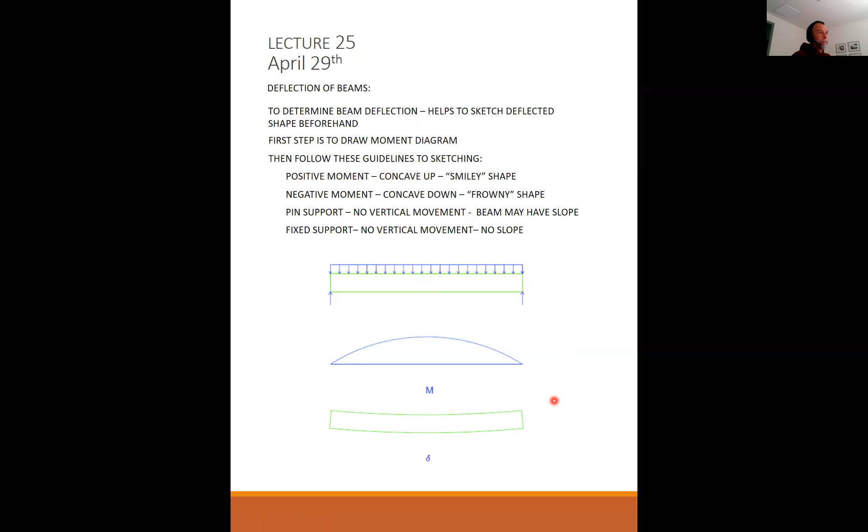Okay, so a positive moment gives a smiley shape. Now we can look at a beam that has a negative moment on it.

This is a load pulling straight up on the beam, which is the opposite of what we're used to seeing. But this is pulling straight up, and so the reactions are pulling down. The point load causes a uniform shear, which causes a linear moment, so the moment diagram is like so. This is a negative moment on the whole span, so the deflected shape is going to be a frowny shape.

Again, some of these are just intuitive—you can picture in your mind, you pull straight up on a stick, it's going to bend up like that.

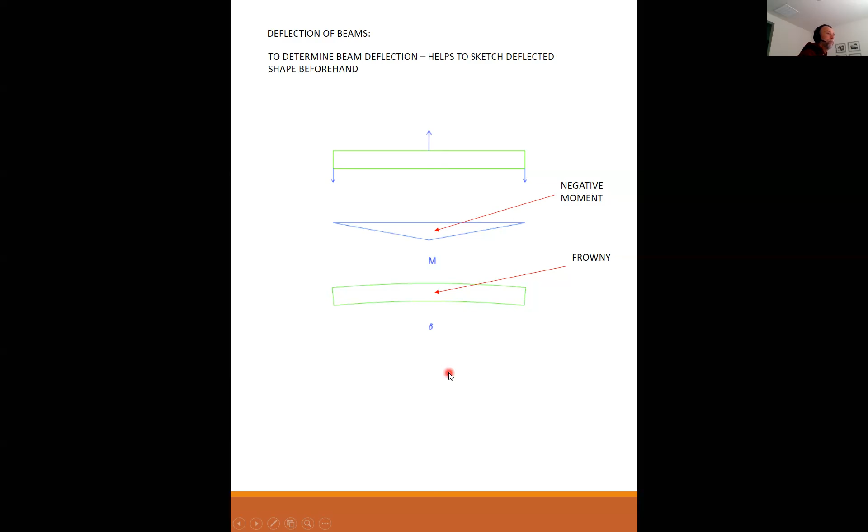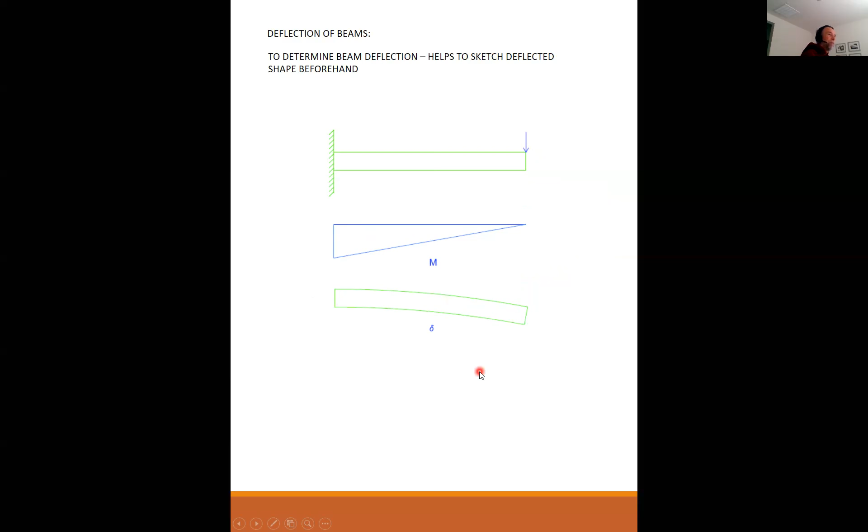There's your half frowny. However, notice that at the fixed point, you have zero deflection. You have maximum deflection out here where the load is, but zero deflection at the fixed point. You also have zero slope at the fixed point. It's a little hard to see in this diagram, but this perpendicular line is absolutely up and down, so the axis of the beam is horizontal right there at the support.

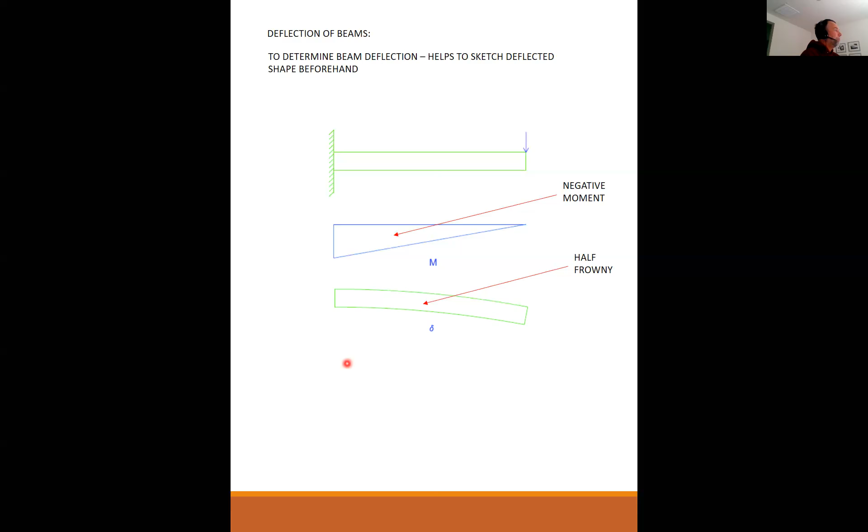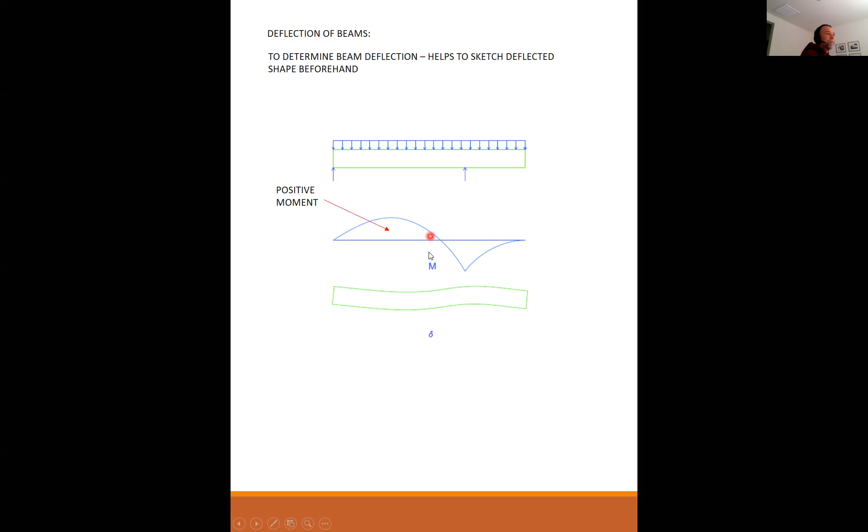So in the positive moment region, the beam is going to be deflected in a smiley shape. In the negative moment region, the beam is going to take on a frowny shape. The inflection area is right in here someplace, so that's your transition from smiley to frowny.

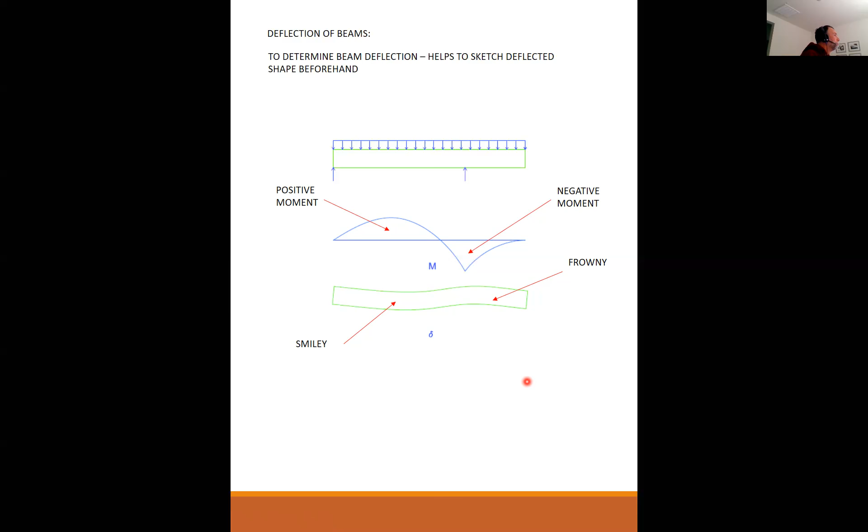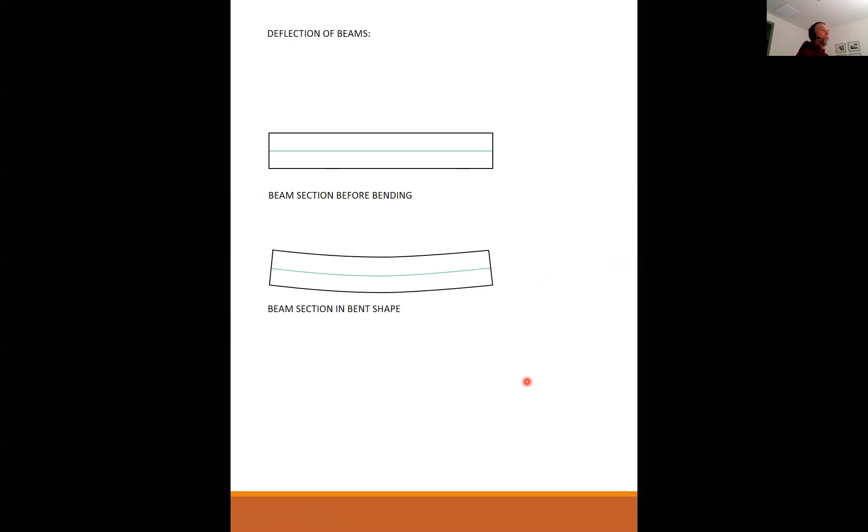Okay, so here we're going to redo a little bit of what we talked about before when we derived the flexural formula. We're going to start with the beam before bending, where the neutral axis is, of course, horizontal in the same plane as the beam itself. Once the beam is bending, then the neutral axis has to bend with the beam.

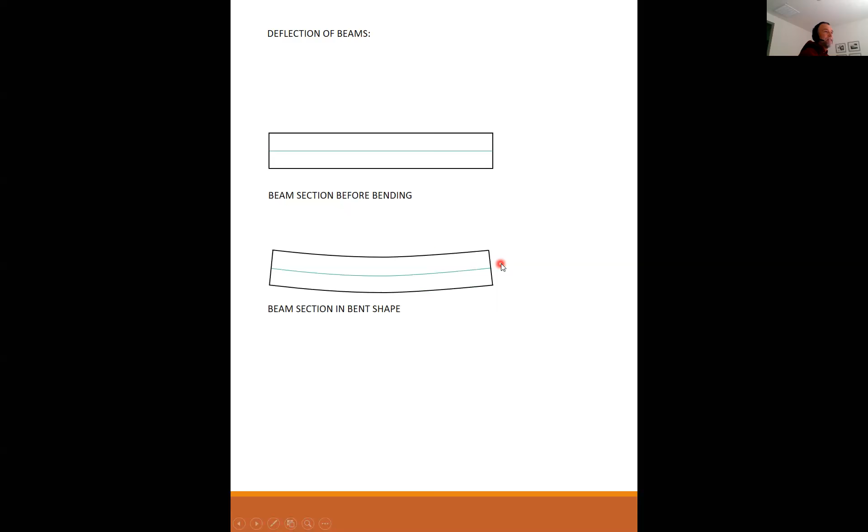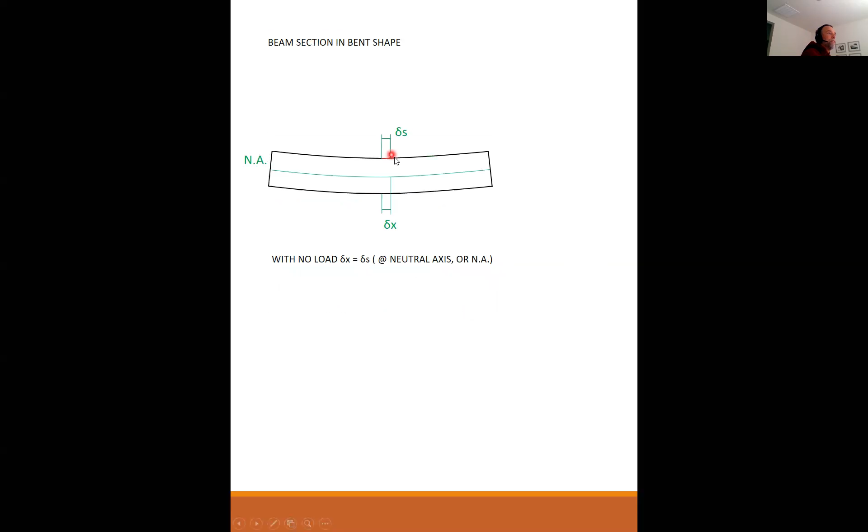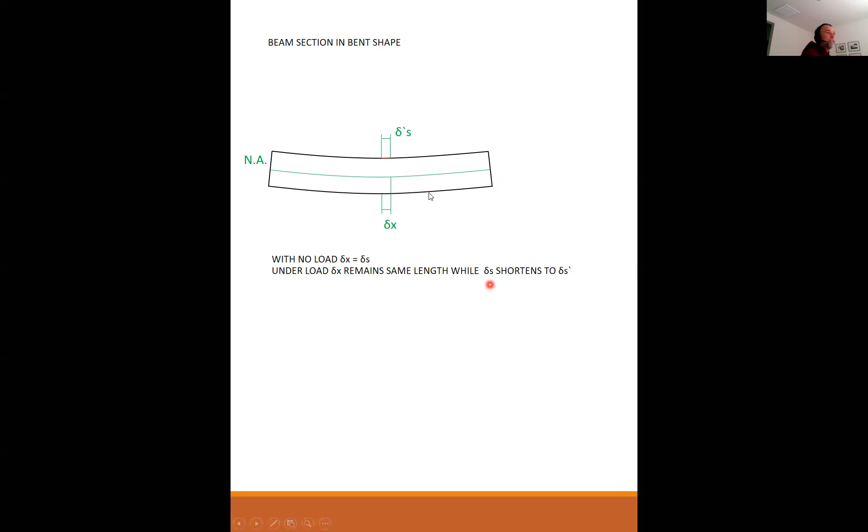We did this before, but what we're looking at is with no load, the fibers at the top of the beam will have the same length as the fibers at the neutral axis. So delta X is going to equal delta S at the neutral axis. But once you put some load on it, the top fibers are going to shorten, and the bottom fibers are going to elongate due to tension. So delta S is going to shorten to delta S prime at the top here.

Remember our equation for strain, epsilon, is equal to the new length minus the original length, over the original length. So delta S prime minus delta S, divided by delta S. But the original length is the same as the neutral axis length, since the neutral axis length doesn't change because it's at the neutral axis. So we can say delta S prime minus delta X over delta X is the strain.

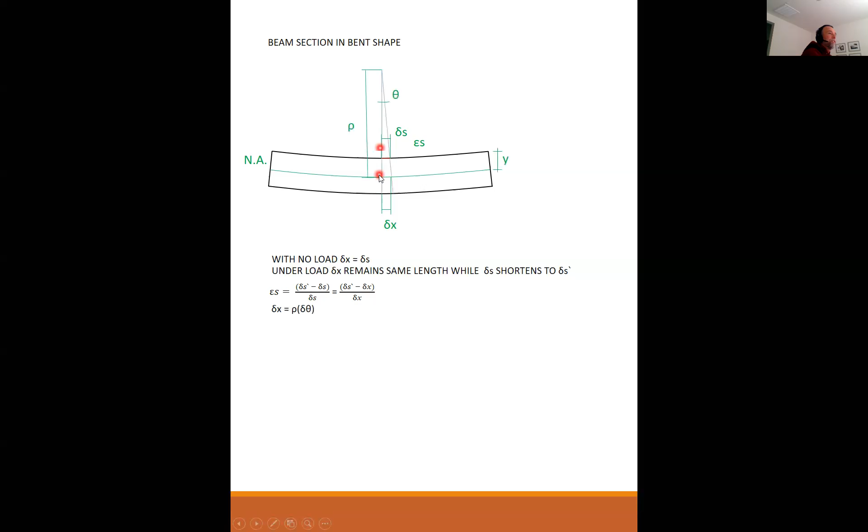By small angle theory, we can say the radius times the change in angle here. As the beam bends, this produces an angle. I labeled that theta, but down here I labeled it delta theta, so it's really the change in angle due to the loading. By small angle theory, delta x is equal to sine of delta theta times rho, which is delta theta times rho.

By the same token, if I reduce the radius from rho to rho minus y, then delta s prime is equal to rho minus y, this radius, times delta theta. So you see how we're getting the relationship here. We're relating delta x to rho, and delta s prime to rho minus y.

So y is the distance from the neutral axis to the point of interest. My strain, epsilon s, is equal to - now all I did is take delta s and plug that in here, and delta x and plug that in there - so I get this equation. The rho's drop out, the delta thetas drop out. I'm sorry, not all the rho's drop out, and what I end up with is minus y over rho.

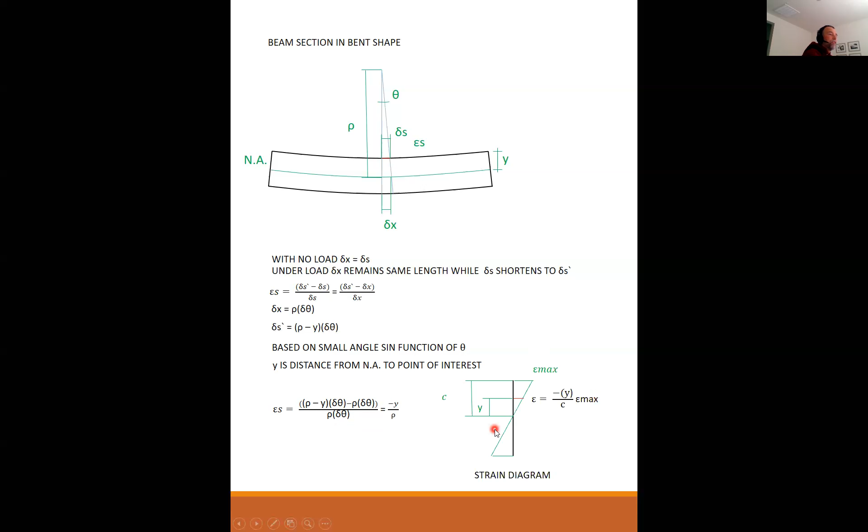This was a proportionality, this is when we're deriving the flexural formula. So I have epsilon is a proportion of epsilon max. Then I substituted epsilon for sigma over E, equal to minus y sigma max over CE. Again, kind of rehashing this, but what we're getting towards is sigma is equal to minus E y over rho.

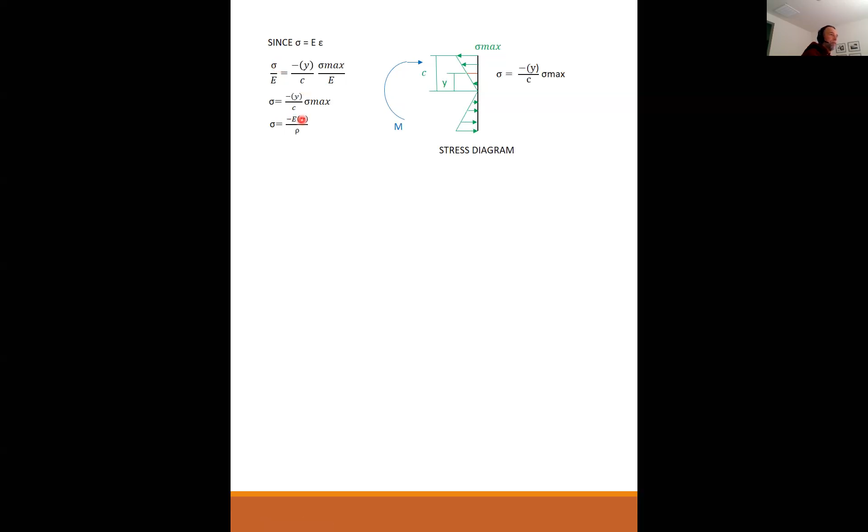Then we found the location of the neutral axis. We sum the integrals of these little pieces of the forces to equal each other, and we plugged and chugged until we got to something that made some sense.

And the neutral axis is located at the centroid for the cross section. Summing all stress about the neutral axis, the moment is equal to the sum of the moments, integral y dF.

This is the second time I presented this exact same material, so I went through it much faster this time. Do I have any questions before I move on to the new material? Okay.

So the new material: we know that sigma is equal to minus my over I, and epsilon is equal to sigma over E, that's Hooke's law, so epsilon is equal to minus my over EI.

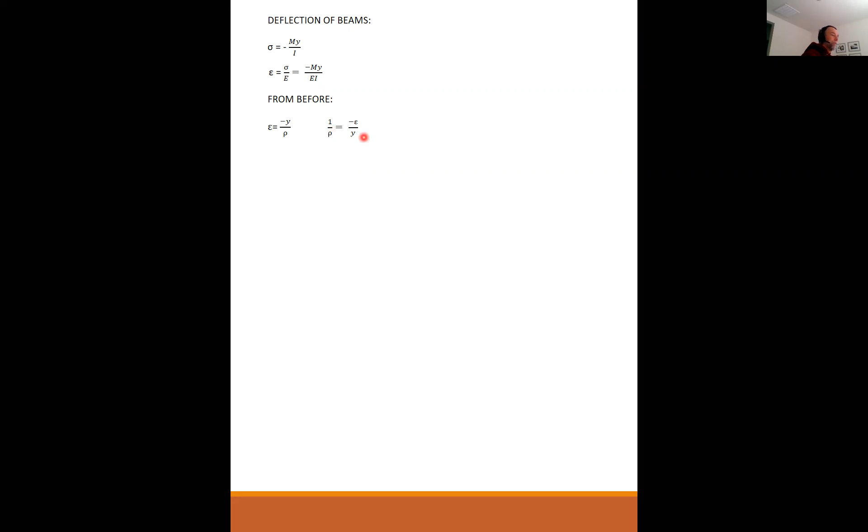And from before, we found that epsilon is minus y over rho. So I can rearrange this to say that 1 over rho is minus epsilon over y. Substituting back in, minus epsilon over y is equal to my over EI divided by y, which is m over EI.

So this is an important finding right here. This finding is that 1 over rho, which is the radius of curvature, 1 over rho is equal to m over EI. The moment divided by basically the stiffness of the beam is what EI represents.

Remember, E is Young's modulus, so that's the stiffness of the material. I is the second moment of the section, so I represents the stiffness of the section properties, E represents the stiffness of the material properties. Combine the two together, M over EI is known as the curvature of the beam.

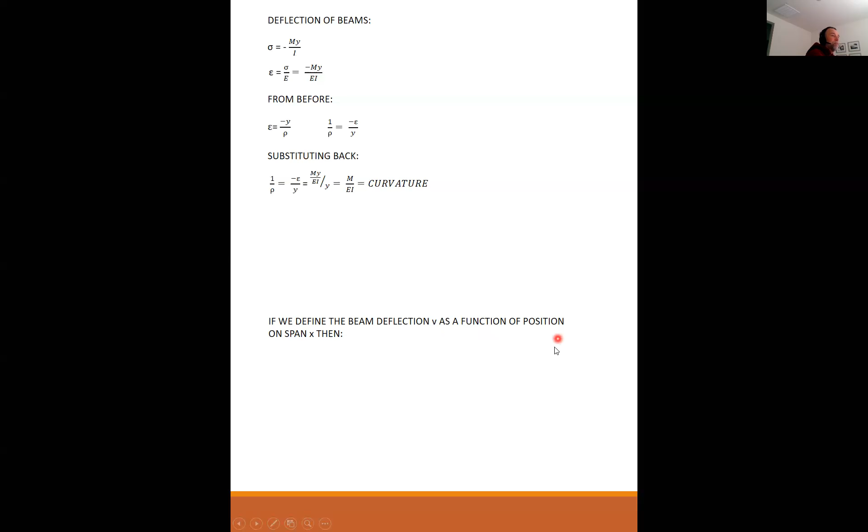So if we define the beam deflection as little v, this is not shear, this is little v, and little v as a function of position on the span x, then at some arbitrary point x, we can solve for the deflection v. V is equal to a function of x.

From calculus, we get the solution to... okay, so what I've done here, the solution to v is equal to f of x, 1 over rho is equal to m over EI.

Yeah, this is a quantum leap right here. They don't really tell you how you get this, but it's part of a partial differential equation. And when you solve it, you get this, quite frankly, kind of monstrosity. So it was basically a leap of faith from here. You had to differentiate this with respect to x to get the v.

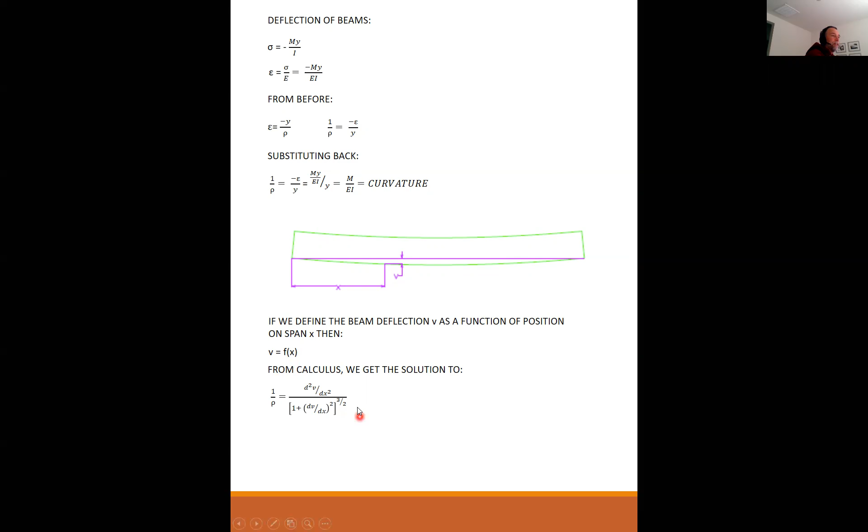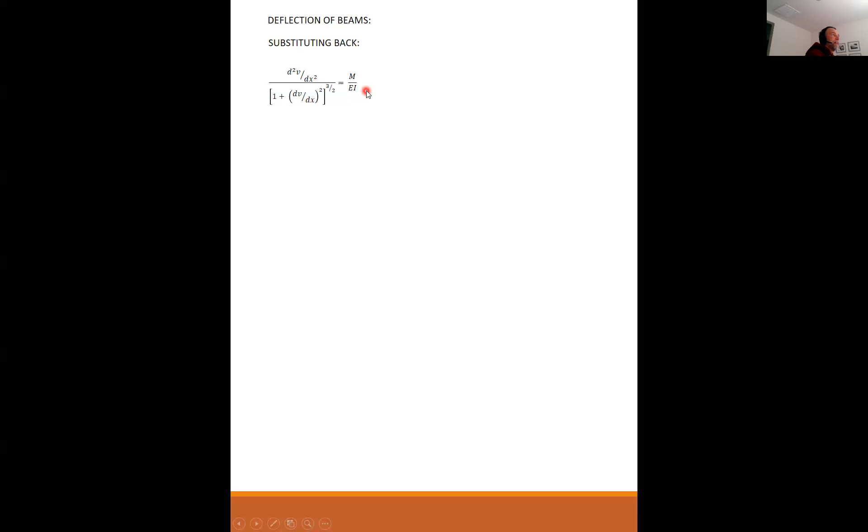Anyway, this is your final, so the curvature is equal to this expression. So this whole expression is equal to m over EI, which is pretty nasty looking, right?

Fortunately, dv dx is the slope, and the slope is very small. So what you might see sometime later in your career is that frame programs like ETABS or SAP 2000 will differentiate between small deflection and large deflection.

And most of the time when you solve for deflections using this software, what you're solving for is small deflection. Small deflection is like a few inches on a beam that's 20, 30 feet long. So a deflection of a few inches on a beam that's several feet long, this slope right here is a very small number, almost equal to 0.

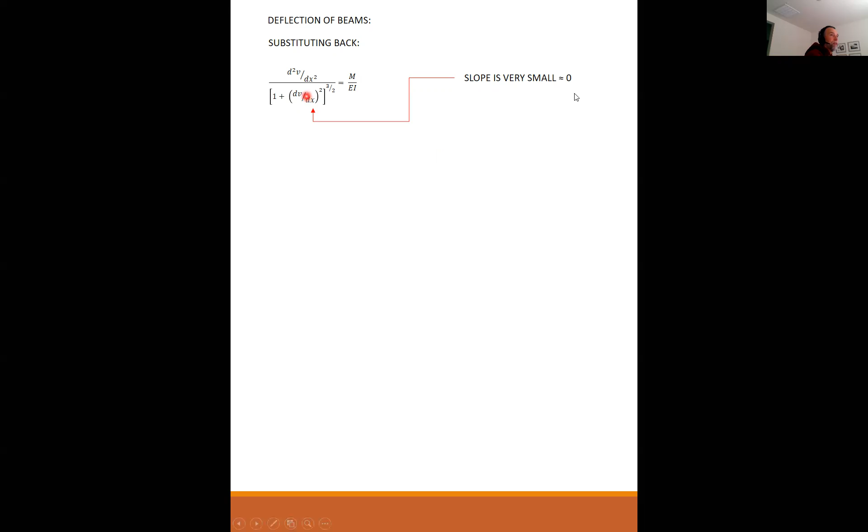And so what we can do with that small deflection assumption is take this out of the equation. If this is 0, 0 squared is 0, 1 plus 0 is 1, 1 to the 3 halves is still 1. So this reduces to a much more palatable d squared v over dx squared.

If the software says that it's doing large deflection, which is a pretty sophisticated piece of software, then they're saying they're not ignoring this point right here, which greatly complicates the expressions. We are going to ignore it. We're going to consider small deflection behavior and move forward with this formulation right here.

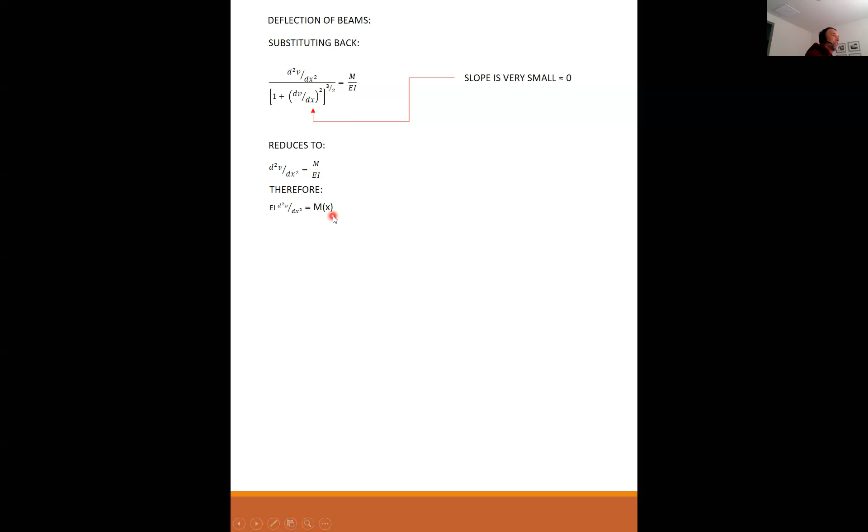So therefore, if I take the EI over to the other side, then EI d squared v dx squared is equal to moment as a function of x. This is known as the double integral method for beam deflection. And where do I get the moment as a function of x? Anybody seen that before?

Anybody remember before we did the graphic method of finding shear and moment diagrams? Before that, we had to solve for the moments as equations. I had asked you for the equation for the moment from 0 to 6 feet, and from 6 feet to 18 feet. That's what this is, the equation for the moment as a function of x.

If I differentiate this expression, then EI times the third derivative of V with respect to x is equal to the shear as a function of x. And EI times the fourth derivative of V with respect to x is equal to the load as a function of x. All of these expressions are linked together as the differential of one, the integral of another.

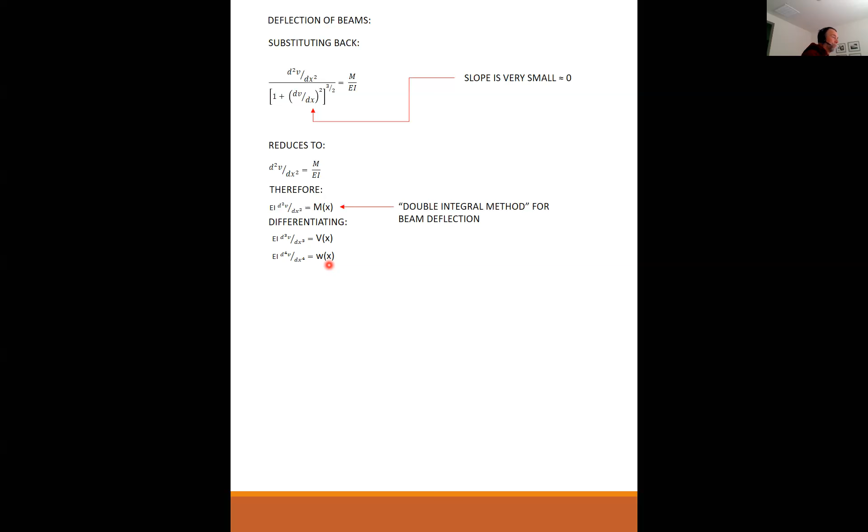Okay, are we ready for an example, to see how this all plays out? Let's start with a pretty simple one. It's a simply supported beam with a load P on it. The beam is L long and the load is applied at midspan.

You'll see that these examples I'm about to give you, I have 3 or 4 of them, and I don't use any numbers. I'm not using actual spans or actual loads. What I'm going to show you is how the tables are created. If you look in your book, or any other structural analysis book, you'll see lists of tables for common loading conditions like this.

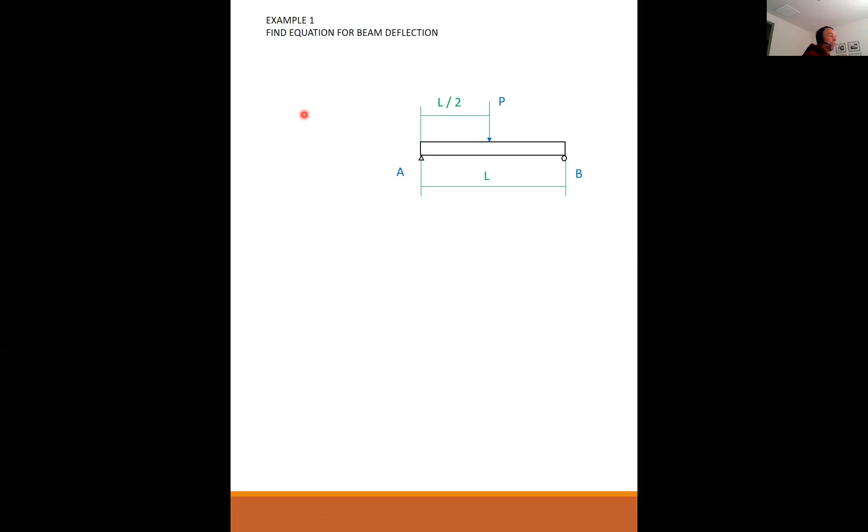They label that table in terms of P, L, L over 2, and give you maximum deflection based on these variables. So that's what we're going to do, derive how those tables came up with those expressions. Once you have the expression, you can always go back to the table and plug in actual values. If this is 10 kips and this is 30 feet, you can go back to the tables and plug those in.

So we're going to follow some basic steps here, which you might recognize. We must first create a free body diagram, and find our reactions. Summing moments about A, P times L over 2 minus RBY times L equals 0, so RBY equals P over 2, as you'd expect. Summing forces in Y, RA equals P over 2.

Now, if I decide on my cut points, remember all this? How many cut points do I need to completely describe this beam? Just 1? No, I actually need 2, but for what I'm going to do here, 1 is going to suffice. You'll see how that works.

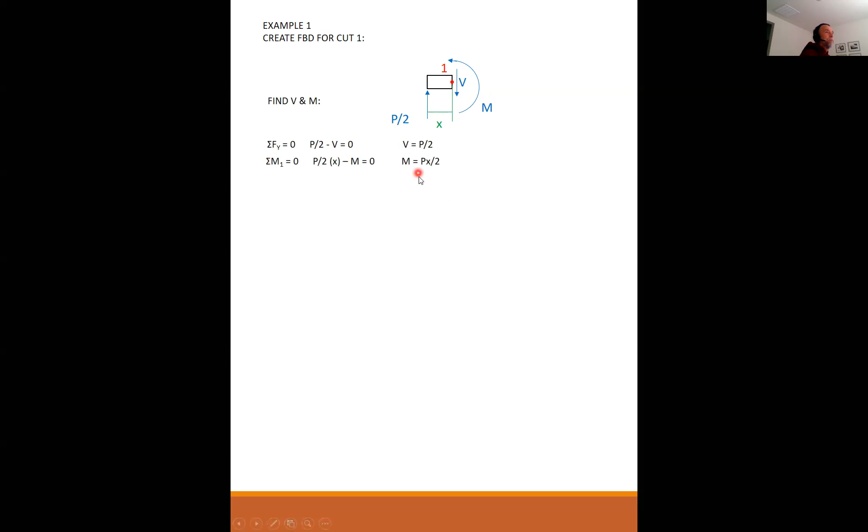Okay, so I have a free body diagram for cut number 1. Remember all this: this is my end reaction, and I have some arbitrary cut at x from the end, with positive moment and positive shear. Find shear and moment: my shear is equal to P over 2. Summing the moments about my cut point, the moment is equal to Px over 2. Here is my equation for the moment from 0 to L over 2.

So back to my equation, dV dx times EI is equal to the integral of mx, which is equal to the integral of Px over 2. If I take Px over 2 and integrate it, I get Px squared over 4 plus my constant of integration.

So this was dV dx. To get to V times EI, I have to integrate all over once again—that's why it's called a double integral, I have to integrate it twice. So now I integrate the findings from the first integration into the second integration. Px squared over 4 becomes Px cubed over 12, C1 becomes C1x, and I have to add C2, so I have 2 constants of integration.

I need to solve those constants of integration using boundary conditions. So what do I know about this beam? The load was at midspan, so I know that dV dx, which is the slope of the beam, has to equal 0 at the midspan. So at x equals L over 2, dV dx has to equal 0—zero slope at the midspan due to symmetry. This doesn't always work, but it works when the load is right at the midspan.

Expound on that, please. No problemo. Let me go back up a slide. Okay, let me go back up 20 slides. Whoa, there we go. This is a special problem.

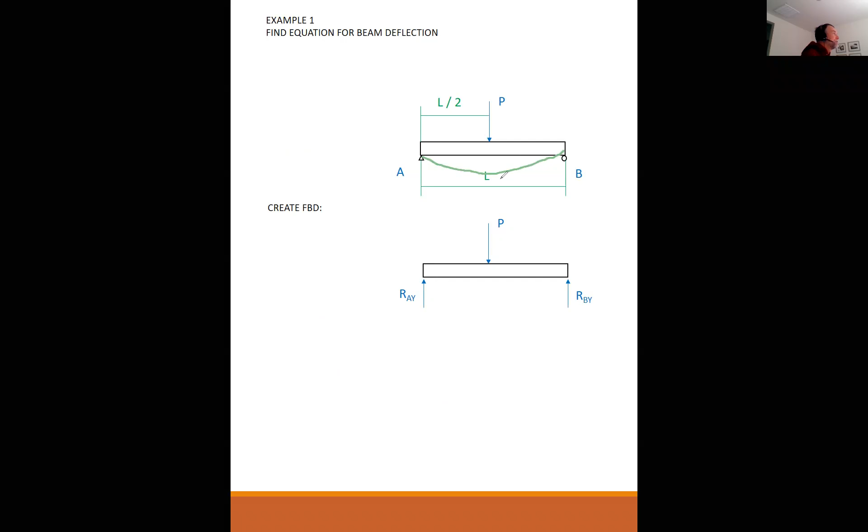But because it is in fact symmetrical, that means I came down here and I did one cut point. If I had done two cut points, I wouldn't have gotten any more information, because everything I solve for and find out between 0 and L over 2, everything on the other side is a mirror image. So I don't need to solve for the other side - I already know it as a mirror image. So that's why I only did one cut.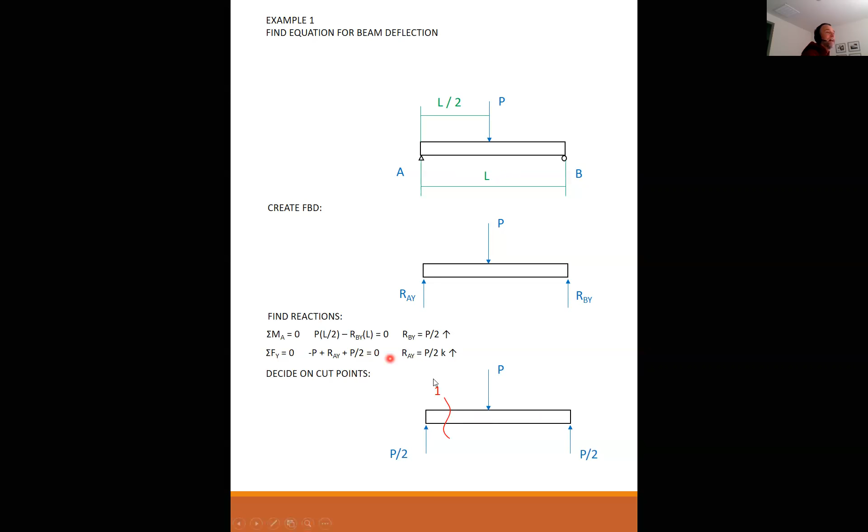So then I got all the way down here, and I got this general equation that is valid anywhere on the span, only because of that symmetry. Does that help? Yeah, thank you. Okay, anybody else? Any other questions before we keep moving?

So does that general equation hold even if the beam and its P's aren't symmetrical? No, and that's a great question, thank you for asking that. No, it does not hold if P is not symmetrical. And the reason that it doesn't hold is right here.

When you solve for your moment, this Px over 2 only holds if that load is absolutely symmetrical. Even though there's no L over 2 in here, if that P was off to one side or the other, this reaction would not be P over 2 anymore. So if this is not P over 2, this is not Px over 2, and it blows the whole thing. So everything we did from here to here is invalidated if that load is not right at the midspan. Does that answer your question, Nick?

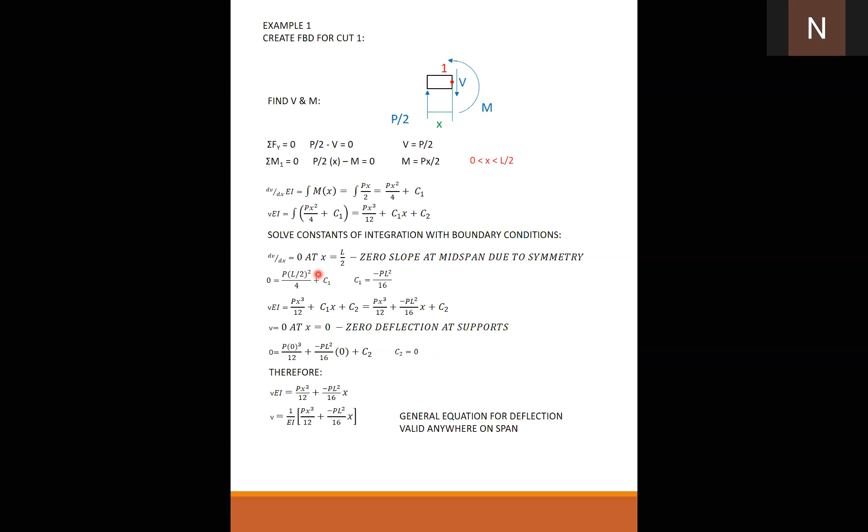No, you just said it perfectly. Yes, I got it. I wasn't sure how you made the jump from dv dx to vi to vei, but now I got it. Now you got it. For anybody else, what Nick said was absolutely spot on.

The deflection is equal to the integral of the equation for the moment. That's why it's called the double integral, but we broke it into two pieces. So we said that dv dx is equal to, because remember the original equation was d squared v dx squared. So now we're saying dv dx, the slope, is equal to the first integral, and the deflection is equal to the second integral.

Anybody else have any questions about that?

Okay, so this is the general form, and because of the symmetry, it's actually valid anywhere on the beam. So that doesn't actually give me the maximum deflection, does it? Unless I plug them in there. So what I can do is find the maximum deflection, and that's usually what most people go to the table for. So the general equation...

Due to symmetry, we can tell by observation that the maximum deflection will occur at the midspan, x equal to L over 2. If you don't believe that, then what you can do is take the first derivative of this equation and set it equal to 0.

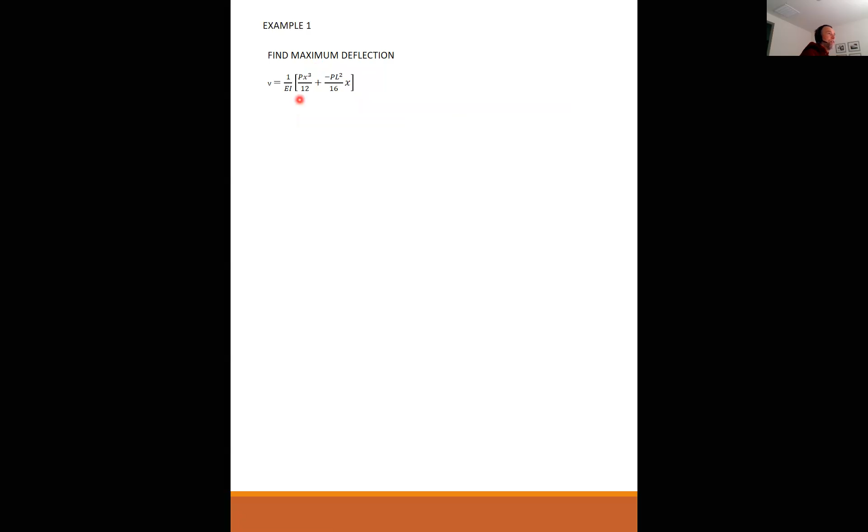Go back here just a phase. This is our final answer, the deformation is equal to this. Well, the first derivative of this is dv dx, which is the slope. So if you weren't sure where the maximum deflection is, you can take the first derivative of your expression for deflection, set that equal to 0, and where the slope is equal to 0 is going to be your maximum deflection. And I can draw that again.

If the beam is deflected like so, doesn't have to be symmetrical, just if the beam's deflected at all like that, then wherever you have—oh, I botched that, let's try that again. There, that's a little better. Wherever you have the slope equal to exactly 0, which is the first derivative of this equal to 0, you have found your point of maximum deformation.

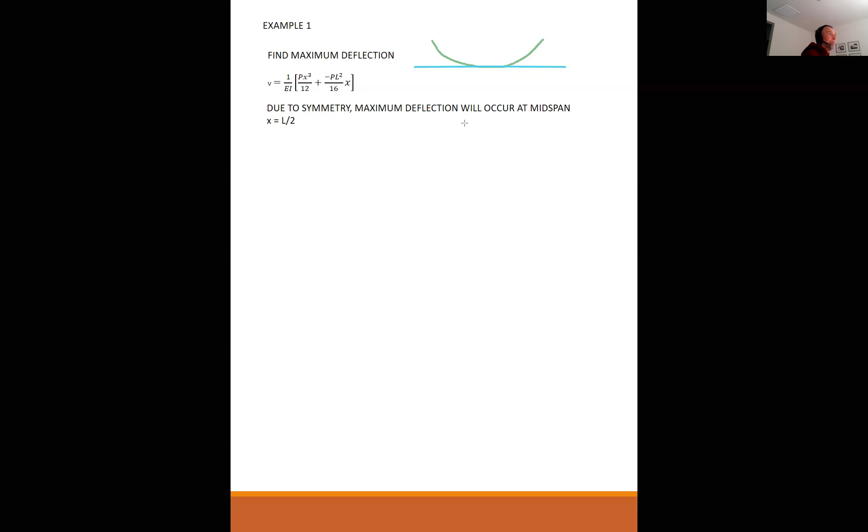Okay, so in this case, I know the maximum deflection is going to be at L over 2. So I can simply plug L over 2 back into X here and here to get this, and then clean it up, and I get my maximum deflection V is equal to minus PL cubed over 48 EI.

So this is V general, this is V max. And this right here is the value that you'll see when you look it up in a table, whether it's in this textbook or a structural theory textbook.

Okay, I think that was the end. Yeah, that's the end of that one. So any questions at all on example 1?

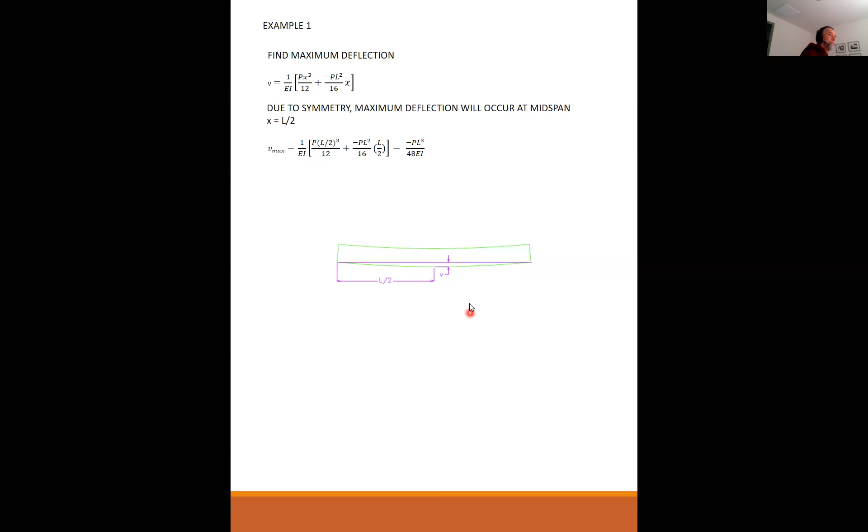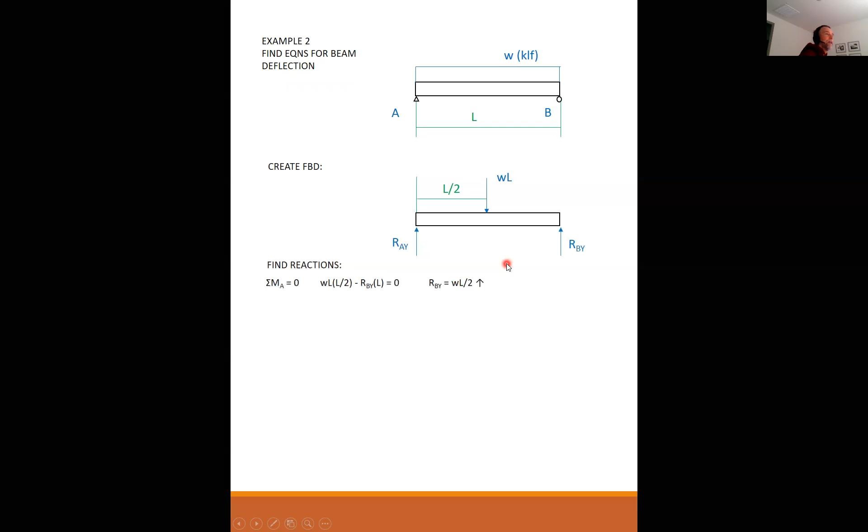Example number 2, find equations for beam deflection. Now we're going to take it up a notch. Instead of a point load, we have a uniform linear load. So I'll go through the same steps. I'm going to create a free body diagram. I've replaced my uniform load with a resultant point load of WL for the purposes only of finding my reactions. Finding my reactions, I have B is WL over 2, and A has to be WL over 2 as well.

Decide on your cut points. Well, this one's clearly going to have one cut point because there's no discontinuities in the load at all. So one cut point completely describes this whole beam.

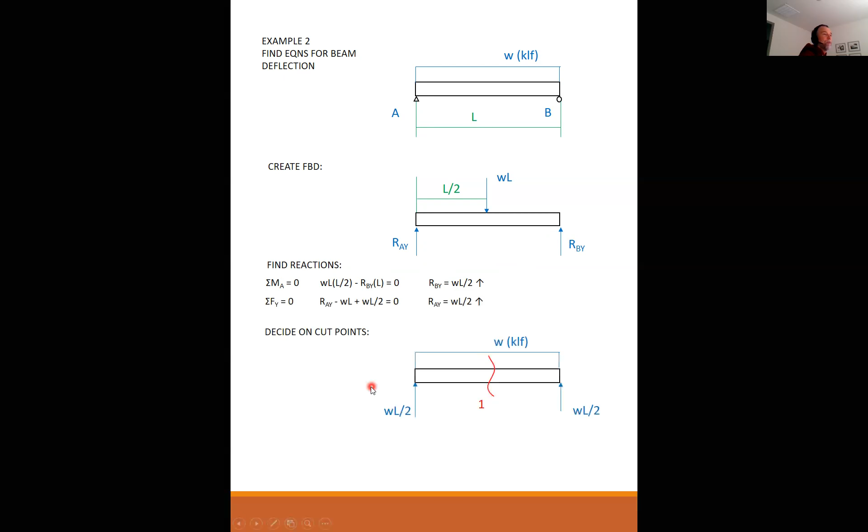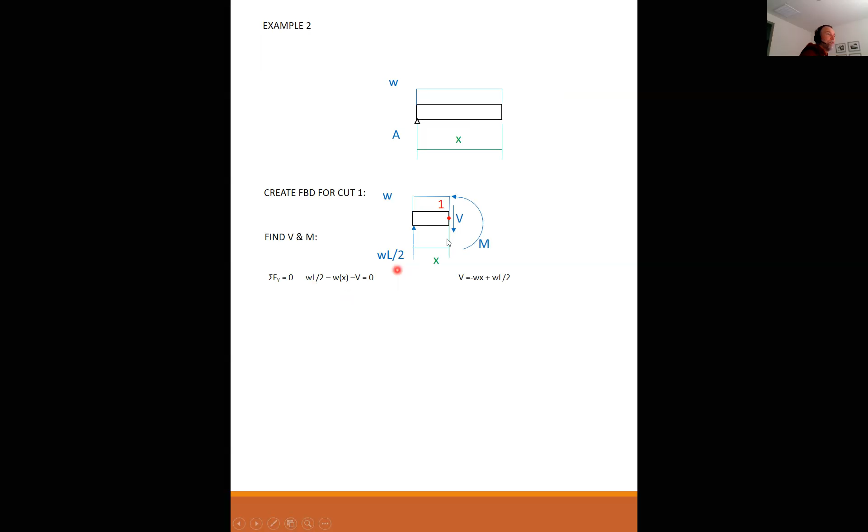So here's my free body diagram for cut 1. Here's my end reaction, positive moment, positive shear. And so I sum my moments about point 1. I have my end reaction times X. I have W pushing down times X—I'm sorry, times X over 2. I'm summing the forces, WL over 2 minus W times X minus V.

That's my expression for shear. And here, more importantly, is my expression for moment: WL over 2 times X minus WX times X over 2 minus M. My moment is minus WX squared over 2 plus WLX over 2, my expression for the moment, basically for the whole span from 0 to L.

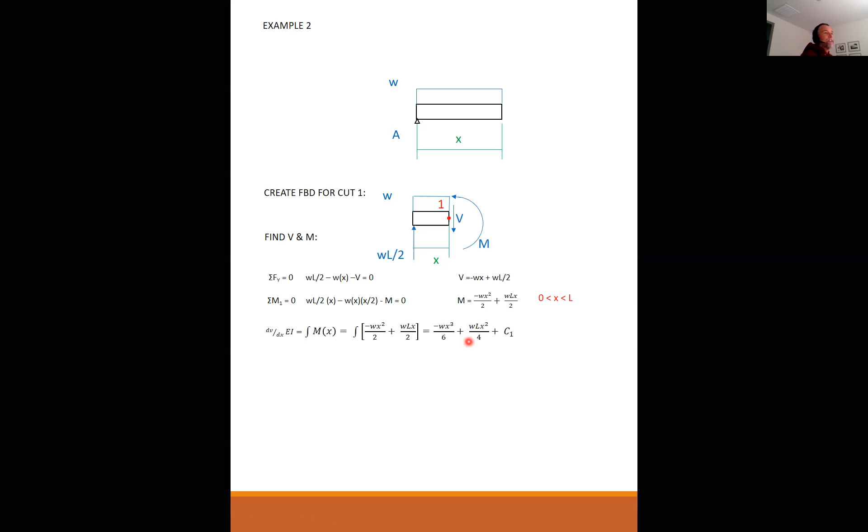Solve the integral. Minus x squared over 2 becomes minus x cubed over 6. WLX over 2 becomes WLX squared over 4, plus your constant of integration.

Now, dV dx, the integral of which is VEI, so I need to take the integral of this result. I just take this and plug it straight into here to find my second integral. So minus WX cubed over 6 becomes minus x to the 4th over 24. WLX squared over 4 becomes WLX cubed over 12. C1 is C1x plus C2.

Now, how do I solve for C1 and C2? I know you're all shy, but somebody shout it out. What am I looking for? Okay, thank you, Nick. I was beginning to wonder if my mic cut out.

Boundary conditions. I solve for C1 and C2 using boundary conditions. So like the problem before, there's two things that I know: I know where the slope is equal to 0, and I know where the deflection is equal to 0. So I'm going to use those two pieces of information. Where the slope is equal to 0 will give me C1, where the deflection is equal to 0 will get me C2.

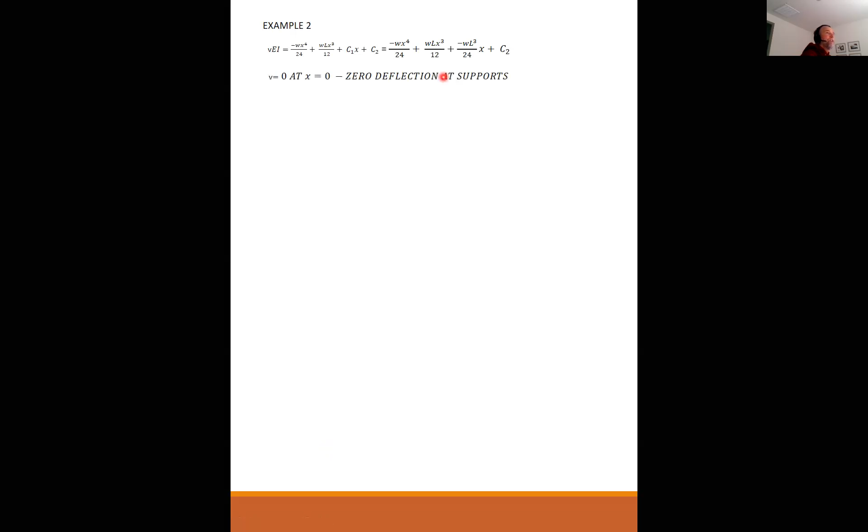To solve for C2, I know that the deflection is always equal to 0 where my supports are. My support is at 0. So I can plug in 0 for all my x's and plug in 0 for my deflection right here, and solve for C2. C2 is equal to 0.

Therefore, my final expression is going to be Wx to the 4th over 24, WLx cubed over 12, minus WL cubed x over 24.

And cleaning it up just marginally, this is my general equation for the deflection, valid anywhere on the span. So you can look this up in the table. It's a little messy, but this lets you plug in any value for x and it'll give you the value for your deflection.

Now, due to symmetry again, we know the maximum deflection is going to occur at the midspan, x equals L over 2. So I can just take my expression for deflection and plug in L over 2 for all my x's. And what I get is 1 over EI times WL to the 4th over 384, plus WL to the 4th over 96, minus WL to the 4th over 48.

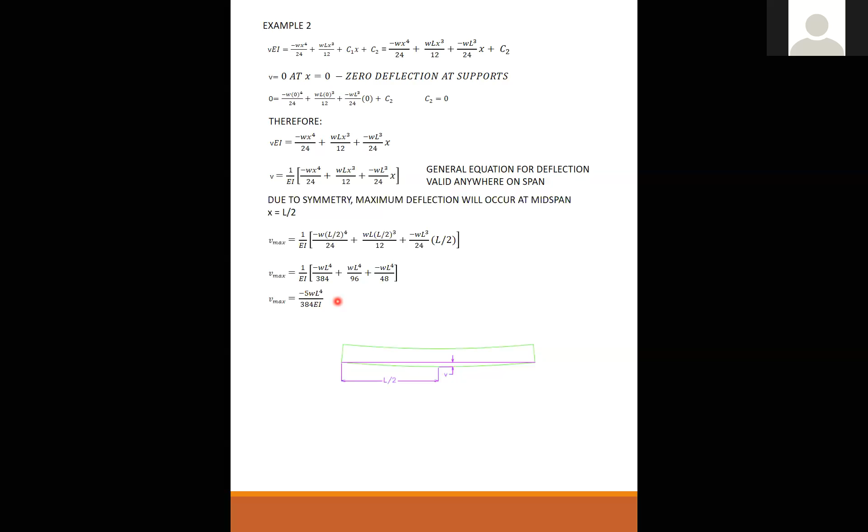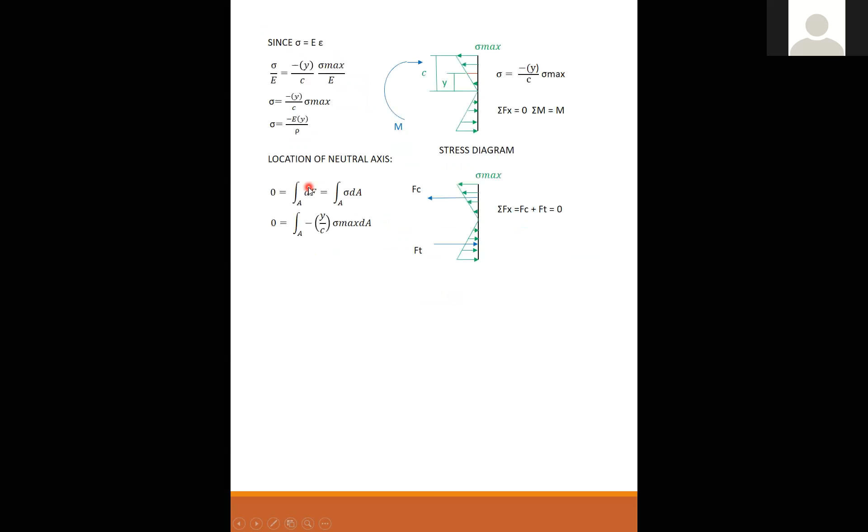Professor Pratt, yes, so what if you can go back a few slides, like maybe two slides? I wanted to see something. There, maybe like the last slide. Uh-oh. Somehow... okay, sorry. No worries. Good recap, yeah, right.

Okay, slow down a little bit here.

Okay, in here somewhere? Yeah, that looks fine. I was just making sure I saw that part. Okay, yeah, that's fine. I got it.

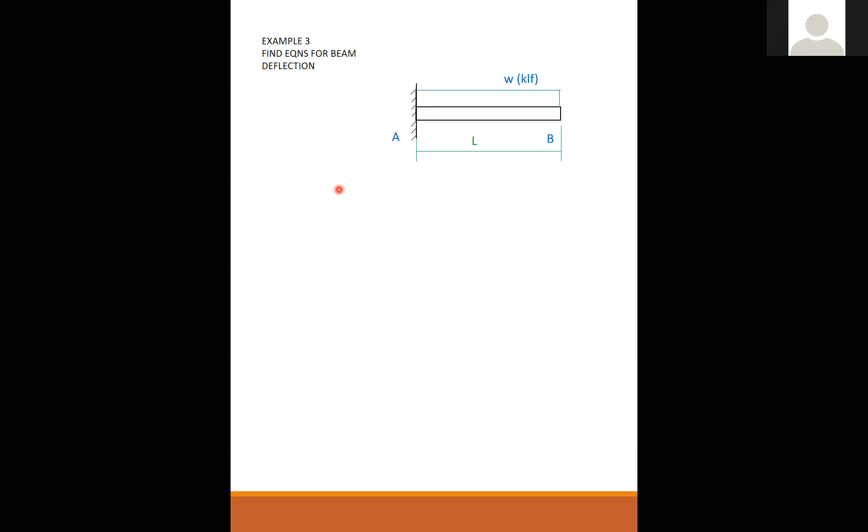Okay, thank you. Okay, no problem.

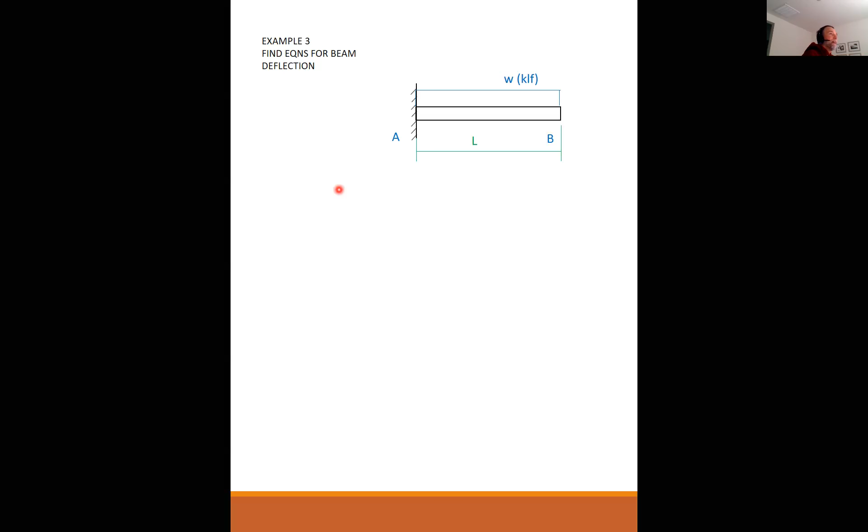Example problem number 3: find equations for beam deflection for a uniformly loaded cantilever beam of length L. We're going to go through the first process: create a free body diagram. The uniform load becomes a resultant for the purposes of solving for our reactions. We find our reactions: summing moments about the point gives a moment reaction of minus WL squared over 2, and a shear of WL.

So here's my problem, and I decide on my cut point. I only need one cut point on the beam because it's continuous, with no discontinuities.

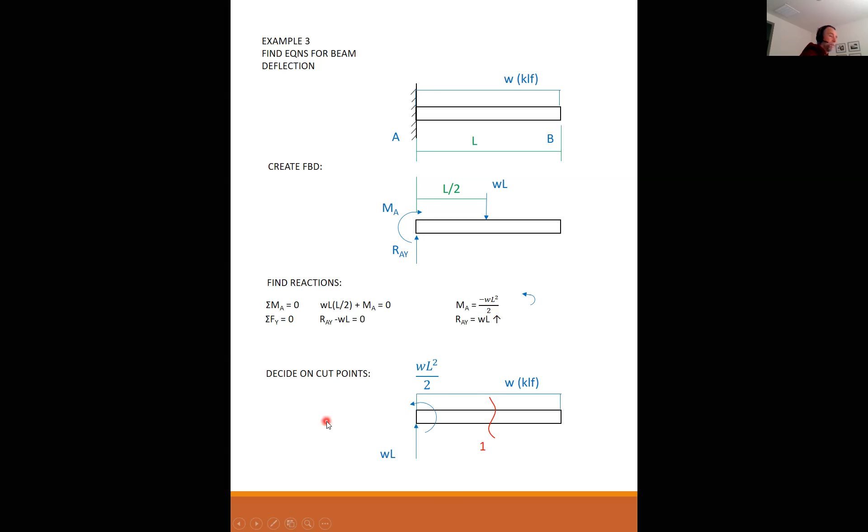For my cut point here, I'm summing moments about point 1. I find my shear, and more importantly, I sum my moments: WL times X minus W times X squared over 2, plus this negative WL squared over 2 end reaction that I have to take into account, minus M, all equals 0. So M is equal to this expression.

I have 3 terms: my end reaction vertical, my end reaction moment, and the load as it is applied. So these 3 terms describe the moment as an equation anywhere on the span of X.

Now we need to find our maximum deflection. Again, we go back to our basic equation: dV dx times EI is the integral of M of x. So I plug in my 3 terms of M of x and find my integral. You can see how each term is the integral of one of these terms, plus C1 is my constant of integration.

Then I need to integrate again. dV dx integrated is V, my deflection, which is the integral of the resultant of the first integral. So all of this gets dumped into here, and I integrate again. Now I have minus WX to the 4th over 24, plus WLX cubed over 6, minus WL squared X squared over 4, plus C1X plus C2.

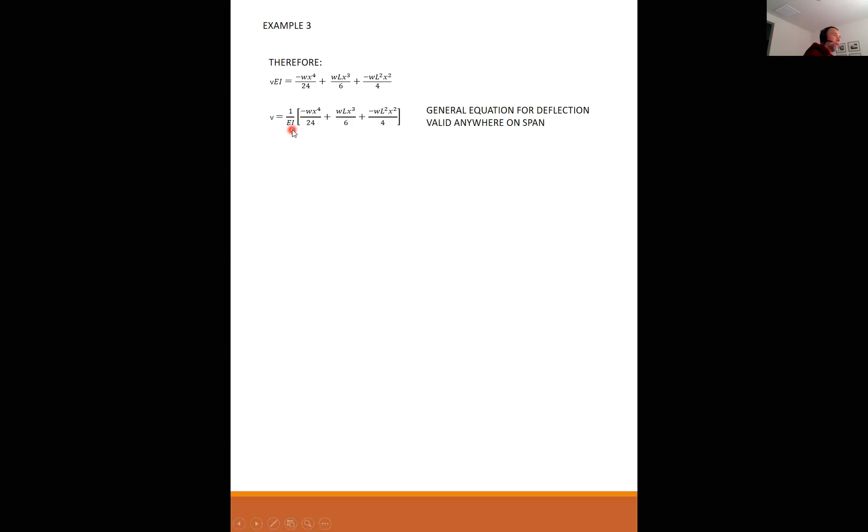To find my maximum deflection at the far end from the fixed support, I know that my maximum deflection is going to occur at L.

So I can plug in L into my general equation to find V max. And it comes down to minus WL to the fourth over 24 plus WL to the fourth over 6 minus WL to the fourth over 4. Combine your fractions, and your final answer is minus WL to the fourth over 8 EI. This will be the value that you see in a textbook.

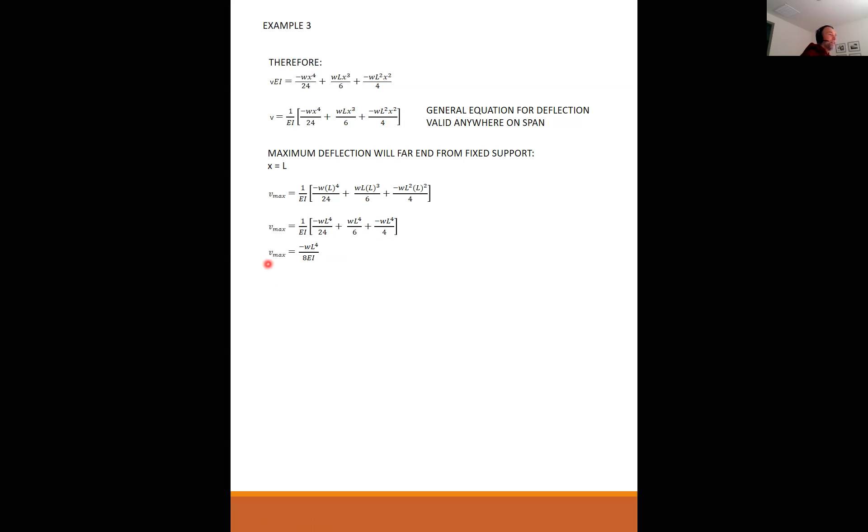Any questions? Example 3: and that's what the deflected beam is going to look like. You can see your maximum deflection occurs at L.

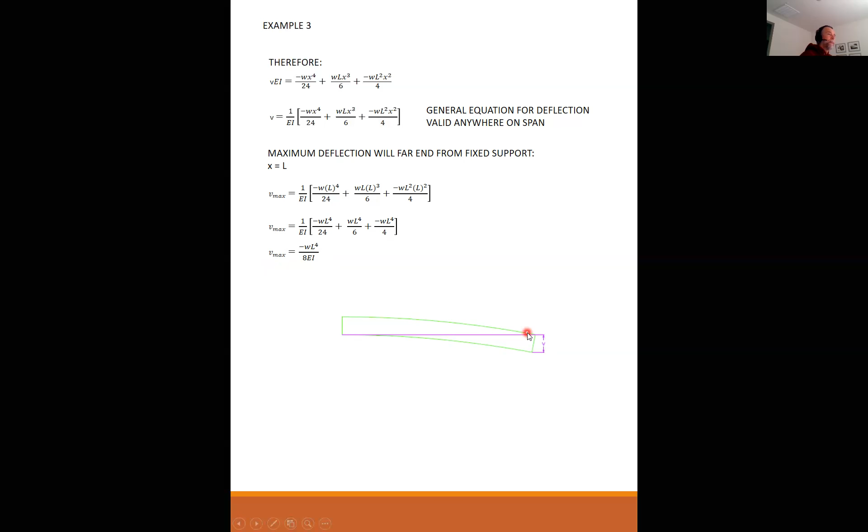Okay, are we ready? Example number 4. This one is similar, except now it's going to have an applied moment at the end of the beam.

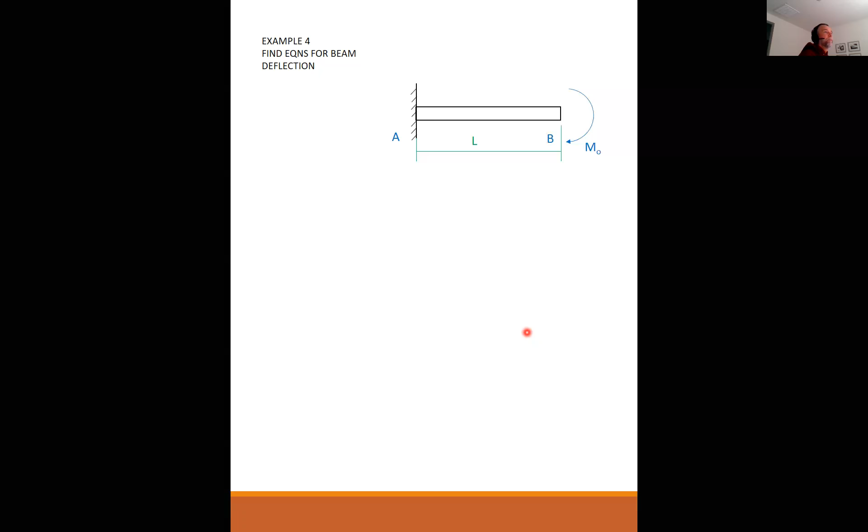So we create our free body diagram, just like before. Find our reactions. MA is going to be equal to minus M naught, the applied load. The shear is equal to 0. Decide on a cut point.

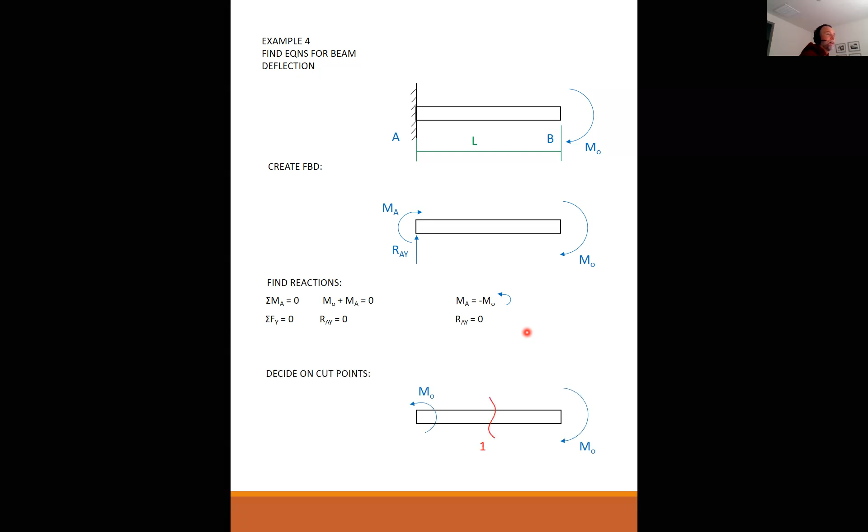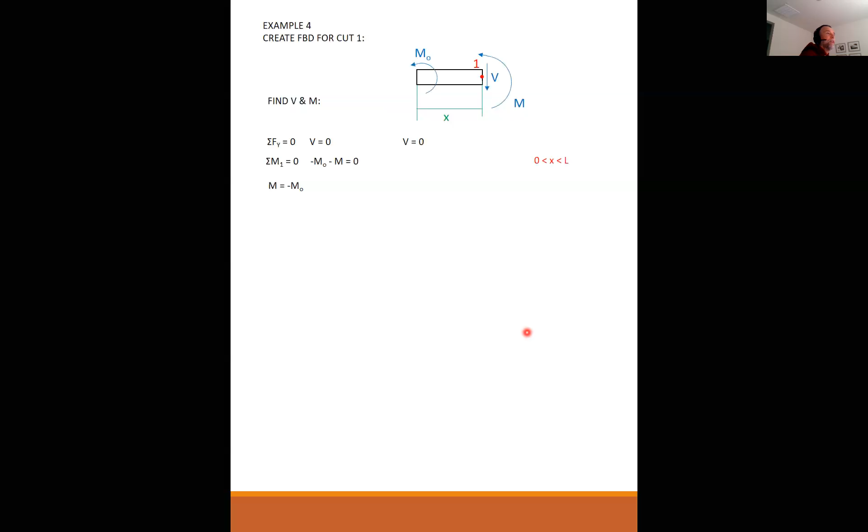I only need 1. Create a free body diagram for cut number 1. Find shear and moment. My shear is equal to 0. My moment is equal to minus M naught, for anywhere on the span between 0 and L. So that's a pretty simple moment expression - it's not even a function of x.

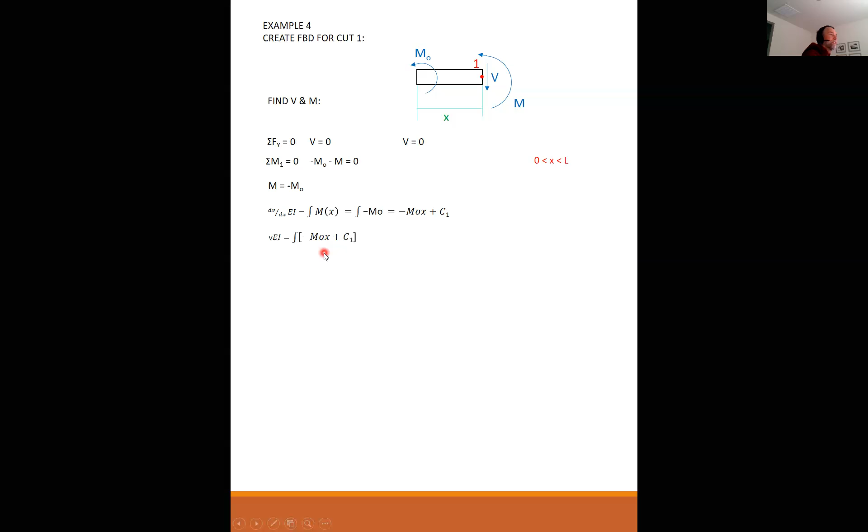So if I do dv/dx, EI is equal to the integral of m of x. That's equal to the integral of minus m naught, which is equal to minus m naught x plus c1. I plug this into my second integral, and I get minus m naught x squared over 2 plus c1x plus c2. How do I find c1 and c2, everybody?

Somebody's going to say the magic words - where the slope is equal to 0, slope at 0. Yeah, boundary conditions, that's what I'm looking for. Solve the constants of integration with boundary conditions. Okay, everybody knows - boundary conditions.

dv/dx is equal to 0 at x equal to 0 because it's fixed, so there's 0 slope at the fixed end. Now I plug in 0 here, I plug in 0 here, I get C1 is equal to 0, which means plugging C1 equal to 0 here, this term drops out. So VEI is equal to minus m naught x squared over 2 plus C2.

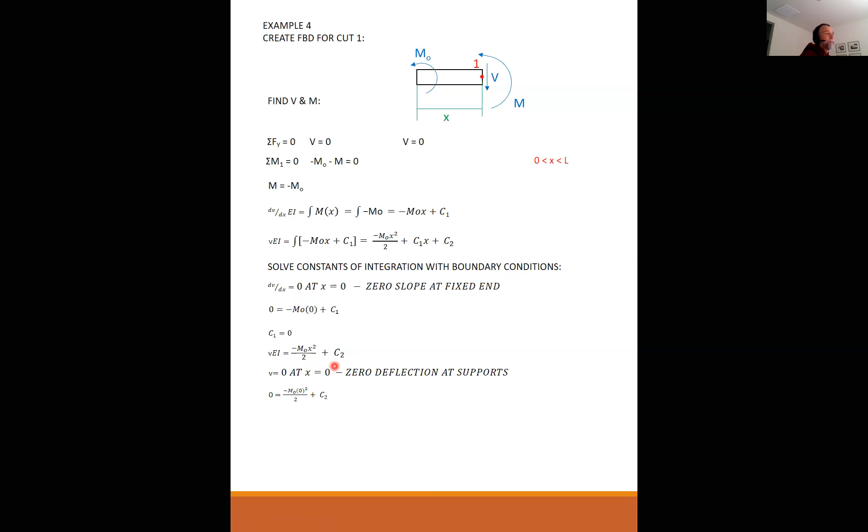The deflection is equal to 0 at x equal to 0. Plug that in there, and C2 is equal to 0. Therefore, VEI equals minus m naught x squared over 2. So here is my general equation for deflection: 1 over EI times minus m naught x squared over 2.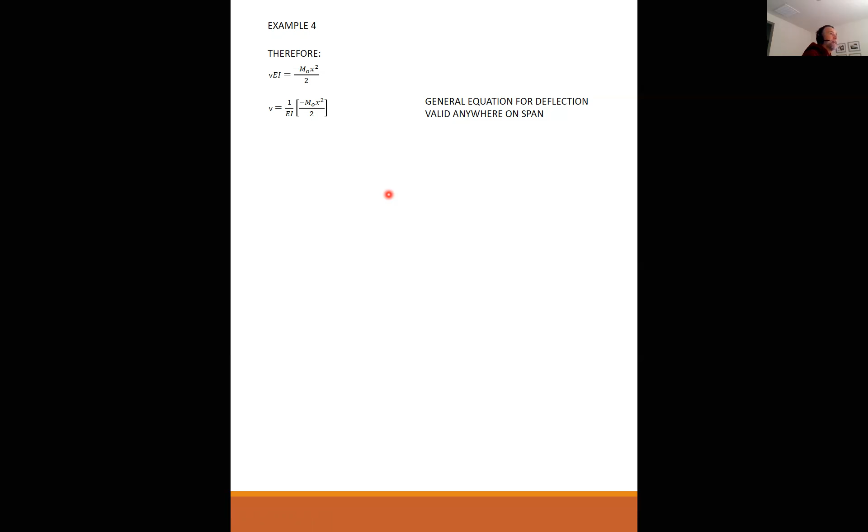Where is the maximum deflection going to occur on this beam? Well again, it's going to be on the tip of the cantilever, so the maximum deflection will be at the far end from the fixed support, x equal to L. So I just plug L into x, and I get my Vmax as 1 over EI times minus m naught L squared over 2. And I just simplified it - so this is the equation, again, that you'll find in your textbook.

Any questions on example 4? That's what the deflected shape is going to look like.

I have a question. Yes. Wait, so why does the maximum deflection occur at the open-ended side of the beam? I was just wondering why. Make sure.

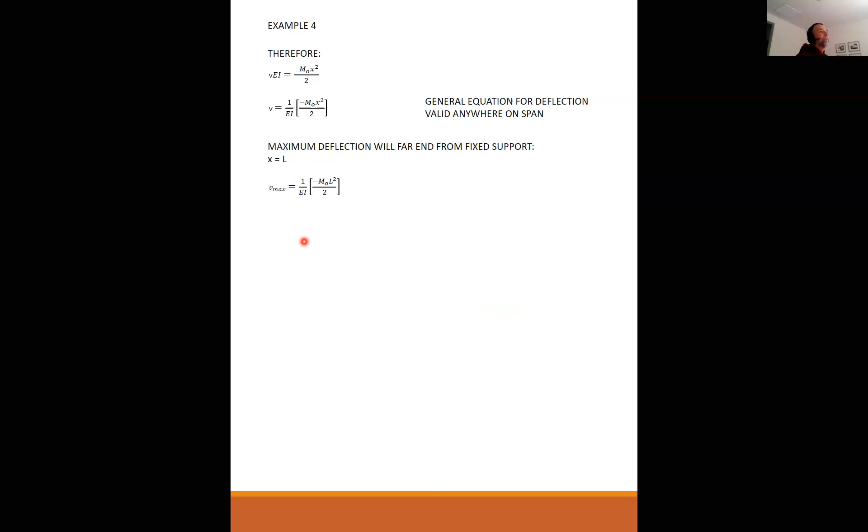Well, I guess one answer is that this is the shape of the beam. Remember how I started by saying sketch the shape of the beam? That moment, as we applied it, produced a negative moment on the beam through the whole span - here you have a negative moment, and so it produces a frowning shape. But it's fixed at the end, so it cannot have any slope at the end, so the frowning shape has to look like this. And so that's how you know that's going to be the maximum deflection.

Oh, okay, that makes more sense. Thank you. Okay, got it.

Any other questions on this?

So for all of these general equations, they're the equations set up for that particular beam setup. The first one was a symmetrical beam, the next one was a symmetrical beam with a uniform distributed load, and the next one would be a cantilever with a uniform load. We're just going down the list. Yes, absolutely, and these can get pretty darn complex.

If you want to have some fun this Saturday night, try doing it with P located at L over 4. It's absolutely totally doable, but what you have to do is take two cuts, and find the equation of the moment from 0 to L over 4, and then a different equation for the moment from L over 4 to L. So 1/4 is one equation and 3/4 is the other equation. You need to integrate both and then add them together. It's absolutely totally solvable, but quite an exercise in calculus.

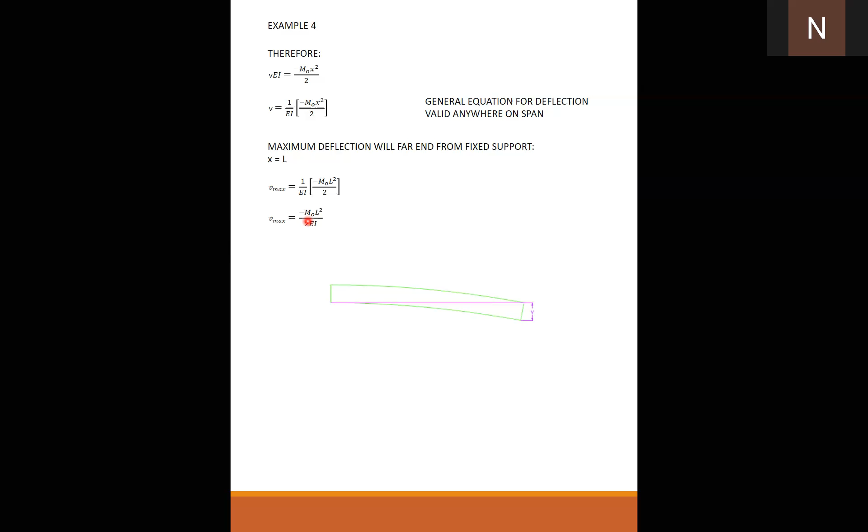Okay, thank you. My next question, as a follow-up to that, would be: as you said, if we move it from L over 2 to L over 4, there was no easy solution of the denominator moving or becoming this much. We have to solve from the beginning, now that we've moved this point, this P, to this L value - we have to start all over again. Yes, exactly right.

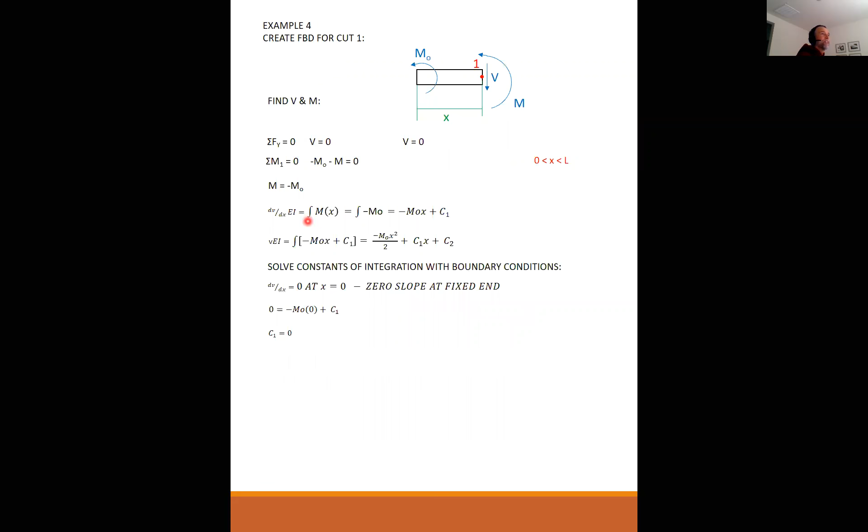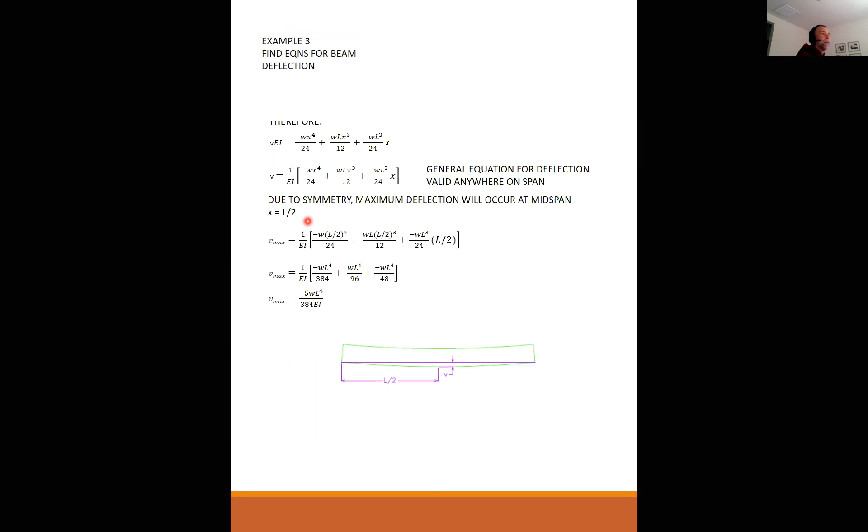And the way that the textbooks and the manuals help you with these equations - let's zip up there for a second and look at that one. That's an interesting case. Let's see, where are we? Example 2.

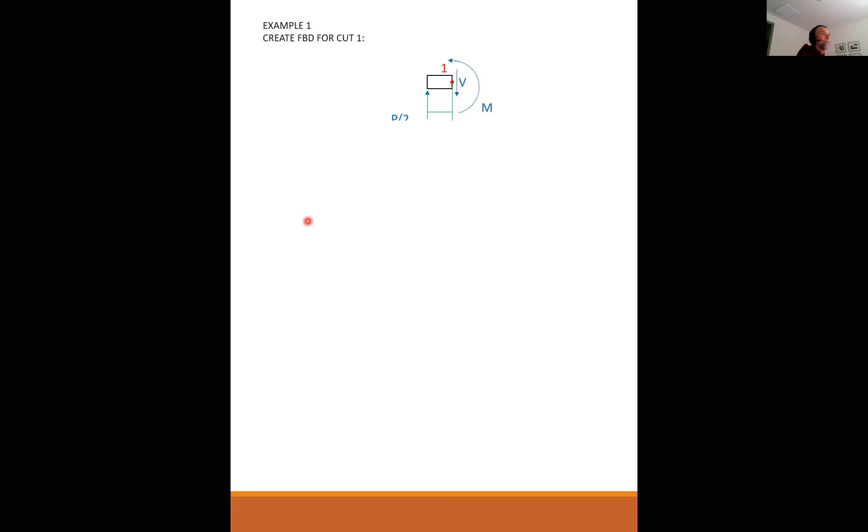Okay, example 1 right there. So say that was L over 4 instead of L over 2. The way you'll find these equations is they solve this in terms of - they create a new variable where the distance from the end to the point load is A, and from the point load to B is B. So A and B are actually variables.

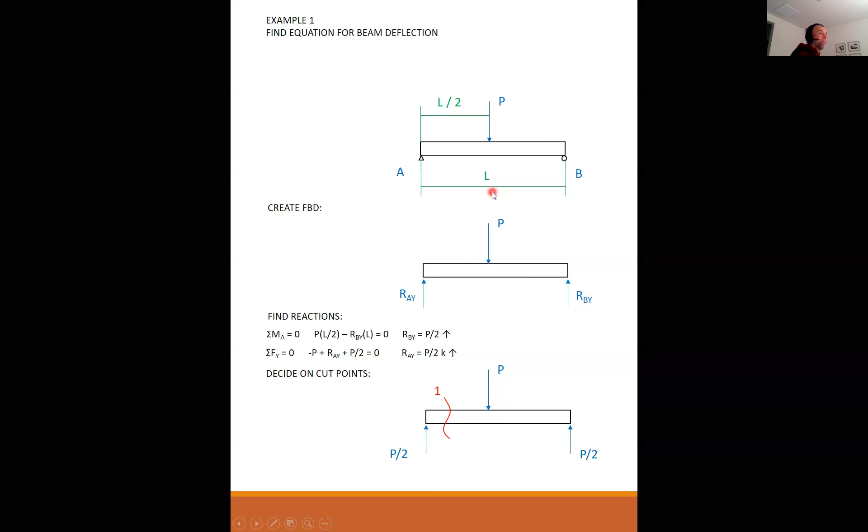And then they'll solve this in terms of A and B. So your reaction at B is equal to a ratio of P times A over L, and the reaction at A is a ratio of P times B over L. So A and B go right into these two reactions, which then, when you sum your moments, you have a function of A built right into your moment here. And then you've got to solve this - but think about this for a second.

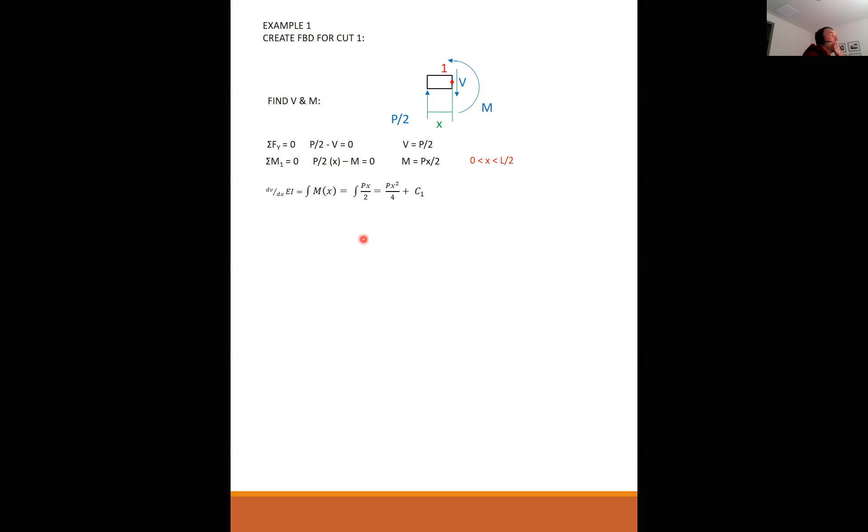That's what it is, that's okay. So when we do these integrals, one thing that I left off - you know what, I'm glad you asked that, because one thing I did inadvertently, I simplified this, but each one of these integrals is actually - no, that was a horrible integral sign, let's try that again.

Each one of these is actually from some point to some point. Every one that I did for you was valid from 0 to L, the whole moment diagram. So we were actually integrating from 0 to L, like so. So when you do that integral, the 0 term all drops out.

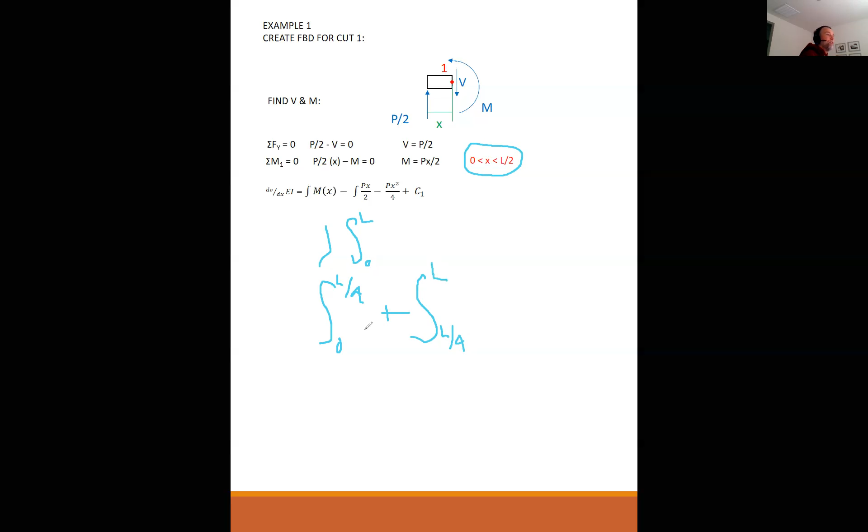But what happens if you needed to integrate from 0 to L, but you have two expressions - one good from 0 to L over 4, and the other good from L over 4 to L. So you'd have one expression for moment here, and a different expression for moment here. And so you've got to solve that.

And so now you have all these terms, because you have all the terms from the first one. Half of them drop out because this is 0, but in the second one they don't drop out - you have L over 4 for every x, and L for every x. So you have to add all this together and then refine it down to a final answer. It was more than I was willing to take on as an example for this class, but it is absolutely and most certainly doable.

Okay, did that last 5 minutes make everybody's head hurt, or did that help at all? It helped, it answered my question, but yeah, it's a bit complex. I'm sure an example would help, but it gets the point across.

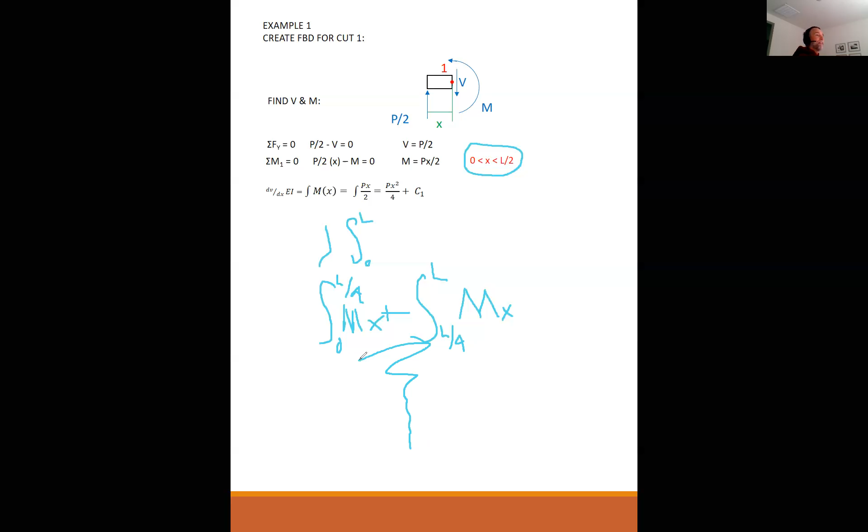The next lecture we do, we're going to use integrals to find deflections of beams through virtual work. You're going to see it's a bit more complex, but you'll see exactly what I'm talking about, where you integrate part of the beam for one equation and the other part for another equation, then add it all back together. I actually have an example next time that does that sort of thing. So it's not exactly this, but it would be performed in a very similar manner.